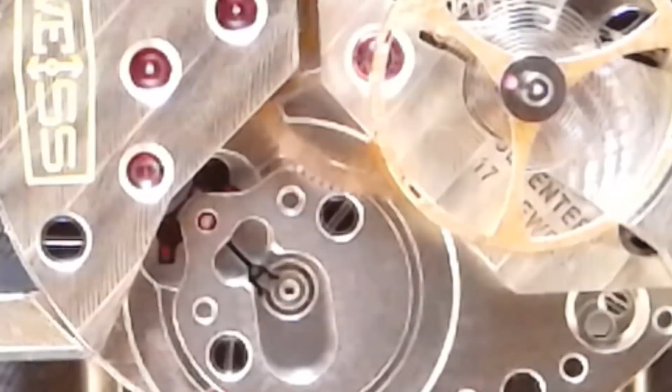And we have your watch, which uses that, right? Is that how you want to start? Yeah, my watch has the Swiss Lever Escapement in it. Boom, we zoom in. I'm glad that all of you out there were so kind and commented nice things about our new watch cam. Some people asked what it's called, an IPEVO. I got it on Amazon. So it's whatever, you roll the dice, you win some, you lose some. We won this one, it's good.

Okay, so to start, I'm the student here, and I don't know a whole lot about escapements. They kind of confuse me and intimidate me. Well, they're quite simple once you get down to the little details in them.

I have one here on the screen that I opened up, and the escapement includes your balance wheel, which if you've ever had an open watch where you can see the movement through the case back, the balance wheel is what's bouncing back and forth really quick. It's the one thing that's moving quickly, and you can really see it move. The center of the action of your watch is the balance wheel.

Okay, and is the balance wheel, if you had a tourbillon, that's what's going to be inside the tourbillon, right? Yeah, the balance wheel is contained within the tourbillon. Tourbillon keeps that from getting all out of whack from gravity, right? Yes. Okay, because there's a spring that's coiled, and if you could imagine a spring that's coiled, if you hang it one way instead of another way, it's going to droop.

Right, because of gravity. So can you get your little pointer out here for the visual folks? Point out on your movement, and let me zoom out a little bit, so those of you at home know what part of the movement this is. Here's Cameron's movement, and this crown here is where you would wind it, right?

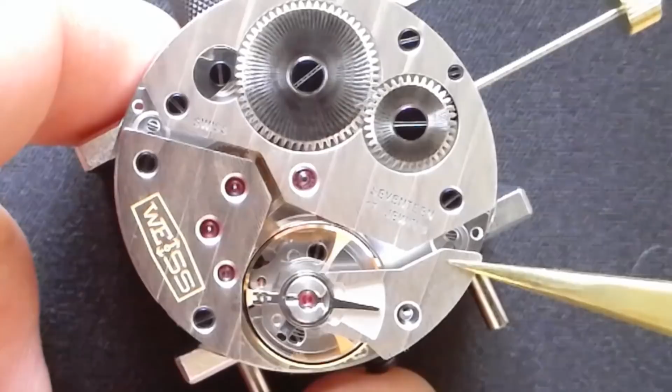And where did you just pull that out of in the watch? So that part, it goes in there, right here. So it looks remarkably cohesive when it's put together, and then you pull one thing out and go, 'Oh, what am I looking at here?' Exactly. All right, so that's removed. Okay.

This episode might be a little more visual, folks, if you're just listening at home, because we have to point at a lot of stuff. Yeah, so escapements, they're tiny, and they only really serve one function, right? They just go about it in very different ways.

Yeah, and there's a couple of culprits that cause problems with the escapement and timekeeping. So those culprits are really what weird escapements focus on, these oddball escapements that are different than the Swiss lever. They're trying to solve a certain problem.

Yeah, okay, so show me how yours works. I'll zoom back in down. Yeah, let's zoom in a little bit. There we go. So in the Swiss lever, you've got your balance wheel, and there's my little pointer there. So right on the bottom of the balance wheel, we have a roller jewel. This red pin hangs down from the underside of the balance wheel.

As that balance wheel oscillates back and forth, that jewel will interact with your pallet fork, which is another part of the escapement. The pallet fork has a pivot right here, and the tail is what gets knocked back and forth, just like this. So the wheel, by moving that jewel back and forth, moves the pallet fork back and forth.

Let's switch to the animation picture here. On this photo, you can see those three components. From the right to the left, you've got your roller table that has the roller jewel, you've got your pallet fork that's going to be knocked back and forth, and you've got your escape wheel. And this is not showing the balance wheel.

The balance wheel has been removed because it would kind of obscure some of the other parts. But the balance wheel would be over the roller jewel all the way on the right. Yeah, that's this guy here, for those of you looking at my screen.

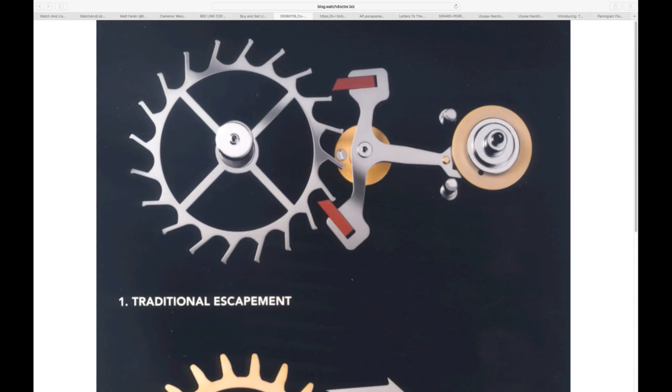So the main thing is to release teeth in an organized fashion rather than the watch just unwinding quickly. So you want the balance wheel to travel back and forth at a certain rate so that it locks and unlocks teeth on your escape wheel at regular intervals.

So the short version is that this wheel bangs back and forth, and it causes this thing to sort of tiptoe dance back and forth, and that action moves a cog wheel one increment per second, roughly. It allows the wheel to move. It doesn't move it, but it allows it to move. Oh yeah, it's like releasing a stopper briefly and then restopping.

So with that, the problem you have is there's a lot of sliding friction, and there's a lot of difference between a watch that's fully wound and a watch that is almost out of power. Okay, so it'll literally slow down and weaken as it runs out of juice. It can, yeah. It's not supposed to, but nothing's perfect. Well, if it's a problem, what is that problem, that it would slow down? Because the spring is losing power as it gets to the end.

It won't always slow down. Could it speed up? It can speed up. If you think about the oscillation of the balance wheel moving fewer degrees, it could potentially move those fewer degrees quicker. That's a good point. It shouldn't, but it could. Either way, it ain't reading what it's supposed to read. That's the point.

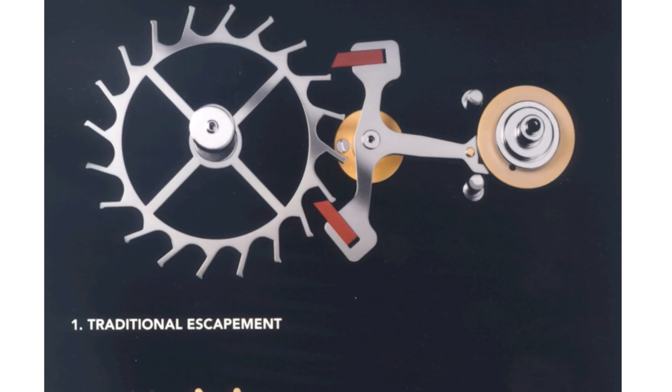Right, okay, I think I get that. It's not too complex. Okay, let's go back to your watch here, and then show me back in real life all those parts again.

So what we've got is the balance wheel with the roller jewel, and the balance wheel will be going back and forth, hitting this side of your pallet fork, which is the tail end. If I can do this.

And the bit that actually knocks on that pallet fork is the little jewel on the end of the wheel there, right? Yes, that little jewel that hangs down.

So if you see, I'm going to touch this very lightly. We're zoomed in, this is where the microscope cam would have come in. I'm just going to touch the tail very lightly, just like the jewel would, and it's going to actually jump forward because not all the power is coming from the jewel. See how I just kind of tap it? Yeah, and it just moved on its own.

So this jewel taps it, and then this wheel will pull it forward the rest of the way. And as it kind of pulls it forward the rest of the way, it'll then hit the other side of the jewel and knock it the other way to keep it moving. Cool, you constantly have to put power back into it.

But there's a lot of sliding friction in there, which requires lubricants, which dry out over time. And also with the sliding friction, you lose energy. So it actually requires like oils.

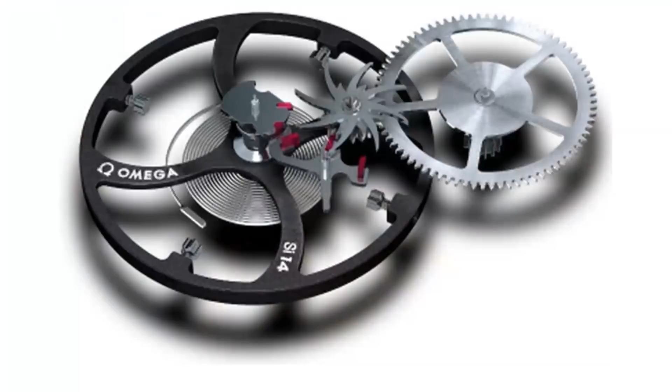Here is the Omega Coaxial Escapement, and we do have a watch. And it is my watch for the next 12 hours. I made a deal, son. I made a trade. This watch, it's got to go, but this has the Omega Coaxial movement.

So what's coaxial? You generally have two things on one axis. This is what that word means. There's something that shares an axis. So what are we looking at in this coaxial movement here, or coaxial escapement?

So the coaxial escapement, first thing that you look at, you're going to see a very odd-shaped wheel that is very different than the standard escape wheel. Are we referring to the throwing star-like wheel, exactly, in the center there? The ninja star right there. Ninja star escapement, yeah.

So you've got that, and then you've also got 3 jewels on the Pallet Fork instead of 2. So your Pallet Fork in this image is right here, sort of to the south of the escapement. And it kind of ends up— this is called the escapement wheel, right? I'm not an idiot, okay, what's this called? For this, we'll call it the escape wheel. And then you've got the Pallet Fork.

The Pallet Fork here is really only working on that wheel. The wheel is also putting direct energy back into the balance. If you look here, you've got 2 jewels on the balance. Remember, Cameron, we're on the radio. Where is here? The center of the balance wheel. So back where we had the roller jewel, which is on the bottom of the balance wheel. Now we've got 2 roller jewels, one on each side. Slightly different shape because they're doing different things.

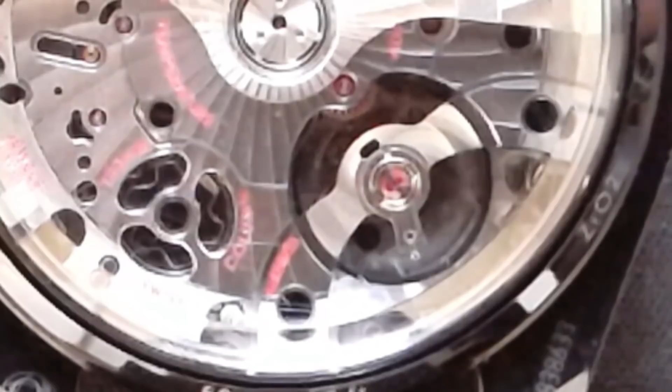So is there anything on this actual watch worth pointing out visually on my Omega there? It's hard to see anything. The one thing they do have here is dual barrels as well. You've got these twin barrels - can't even really see those, right? The only way I can see them is I know that they're colored black, these little black parts peeking out here. So just because I know that now I can see them.

Black is sort of the thing with this watch. You've got the silicon balance wheel, which is black as well under here. But there's really not a whole lot you can see because the components are so small, and they're all kind of hidden under here. But this is one of the current models that uses the coaxial.

Well, the AP escapement looks like this. What is AP? Old school, one of the big three. What have they been around for, 200 years, 150 years? They've been around a very long time, and they've been continually operating.

That's the thing, which is pretty rare, that's what gets you into the big three - continually operating, and they are still privately owned. They also have original family members on the board. That's rare these days, very rare for a watch company to have that.

I think you did say, I was reading before we started recording, our ideas for lists of episodes - one was the family tree of corporations and watchmakers and how that leads to watches being what they are, which I found very interesting. We're gonna do a show on that for sure.

So what has AP contributed to the world of escapements? AP came up with their own oilless escapement. Oilless means less servicing. What does oilless mean?

So less service, because mainly what you're going to see on a manual wind watch is a timing error. You say, 'Oh I have to service this watch because it's running too slow or too fast, something's wrong with the timing.' Maybe it has a shorter power reserve, and only when it's fully wound is it keeping time, and then after 12 hours maybe it stops keeping time. That's going to be because your escapement oils have evaporated.

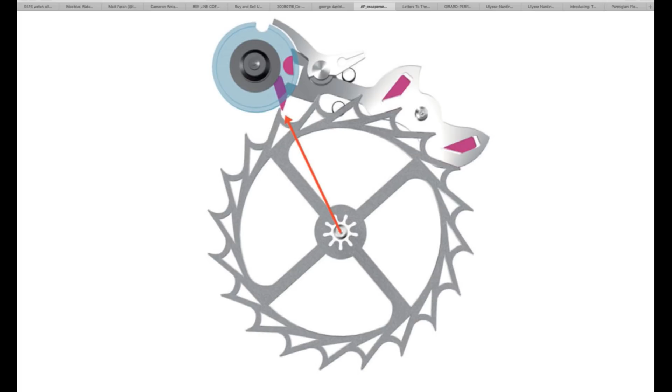Well, the idea is if everything has been adjusted properly and everything is perfect, it should not be able to unlock without the balance wheel being in just the right position. So that's something that the AP escapement took into account, is that shock protection.

So it's got a lot going for it. Especially, I think the most interesting thing is being oilless and using traditional watchmaking materials.

That's very cool. And can this be serviced, or is it kind of a no-service thing? It can be serviced, just replaced parts. Yeah, it can be serviced. So it's more like the Swiss lever in terms of serviceability than it is like the coaxial escapement. The goal was to be traditional, but also have less service intervals by eliminating that oil.

Oh, and do APs have longer service intervals than some other watches? Only the watches with the AP escapement. It's not in every watch. Oh, because AP uses... They also have... The majority of their watches are Swiss lever. Oh, they have a few models that are AP escapement models.

What models, like, no pressure, but what types of... The Chronap. What's the Chronap? It's a pretty cool looking watch if you want to pull it up. We're gonna take a look at that right now. Just one P. Oh, sorry. Audemars Piguet Chronap. AP Chronap.

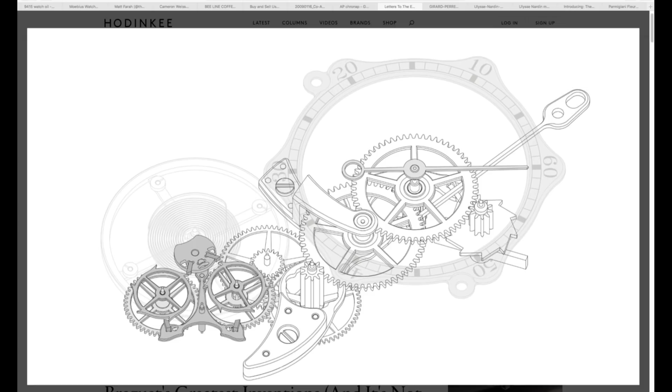FP Journe is an interesting watchmaker because he makes really old school looking watches, but he makes them now, and he hasn't been around for all that long. Well, he has been around a long time - he's a watchmaker that's living and still making watches, so not that long compared to brands started hundreds of years ago. His first watches were like in the 70s or 80s, when he made his first tourbillon, and then I believe in the 90s he started actually selling to the public. So it's maybe 20-25 years.

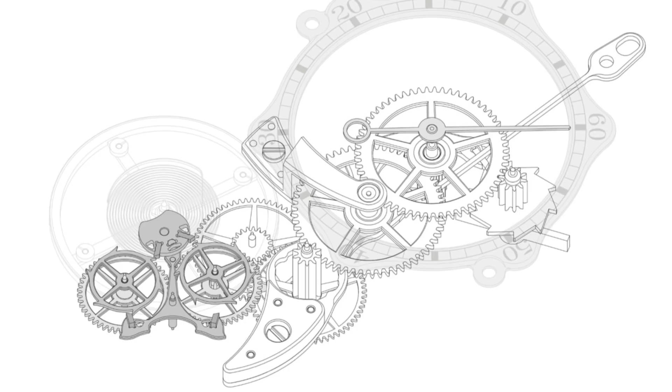So he uses traditional materials, like the AP escapement, which I think is very cool as a watchmaker. I really doubt that in 100 years you're going to be able to open up a watch with a silicon escapement, and if you've got worn or damaged components, how are you going to replace them? Do you think silicon gets worn, or do you think it lasts longer? I think so. I mean, even if a screw comes loose in the movement and blocks up a wheel and you break a tooth or something, it could really be anything - water gets in there. So the traditional materials, to me as a watchmaker, are very interesting. Not to say the silicon escapements aren't interesting, but I just don't know if, 100 years from now, there will be people who can open it up and fix it, similar to how we can open watches that are hundreds of years old and fix them, because they were made with technology that's still really accessible for the average watchmaker, whereas I don't see silicon technology becoming accessible for the average watchmaker.

Cool, FP Journe. Moving on.

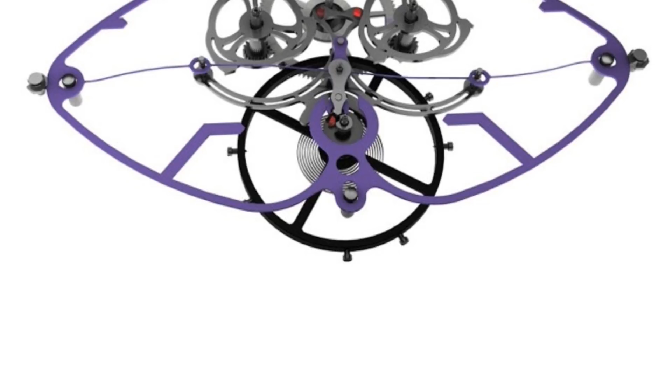Girard Perregaux. Cameron, here's a crazy escapement. I'm sorry, my image is a little off here, folks. Instead of looking like a regular escapement, this thing looks like some kind of butterfly insect - just a very odd-looking system. I don't really understand what it is that I am looking at, but something tells me that you do.

As well as I can without having ever seen one of these in person - I don't know a lot about Girard Perregaux. What is their deal? I mean, I know they make a very high-end watch, but is there something that's their thing? They've been around a long time. Recently, they've kind of not been doing the best job with their designs and marketing and things like that. They're still a great company, they have amazing watchmakers and great teams of people working on everything, but they haven't really been hitting it out of the park as far as getting the word out there and coming up with designs that people are really getting behind.

Overall aesthetic designs. Yeah, but they have a cool escapement. Yes, they do have a very cool escapement.

So what is this called and how does it work? This is their Constant Force escapement, the Girard-Perregaux Constant Force. Constant Force is kind of a general term, and all anyone saying Constant Force really means is that from when the watch is fully wound, it's going to have the same amount of force going into the escapement as when it's almost empty.

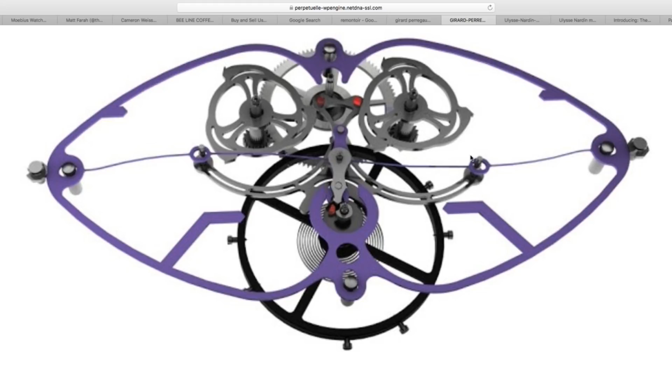I haven't seen that in any other escapement design. And then your balance will come back again and knock it off of that tooth it had just locked on, and it will do the same thing on the other side, where it ramps up and snaps back the other way. It's really cool.

And it looks good when it's in a watch, too. Some of these are extremely dope. I mean, look at that. This is some craziness. Is that the back or the front? That's the back, but I wish it was the front. You can put the clock on that. These watches look very cool.

Well, that's certainly a neat escapement. This is like a defining feature of this company, then, huh? Yes, I think this is the biggest thing to come from them in a long time. It's really, really cool looking. I'm trying to find the best.

That's a good zoomed in image of it there. Really, really cool. And so the idea is it's better at regulating that even force all the way until it runs out of juice. Yeah, over the whole 6 days of power reserve, keeping everything regular so that the timing doesn't change, and also eliminating the need for lubrication.

No lubricants there either, yeah. And the reason they won't have lubricants here, I believe, is going to be the material. I'm not sure about what kind of sliding friction, because you do have sliding friction on that escape wheel. Well, you wouldn't want to have lubricants, right? Because you can see it all. Wouldn't it get all messy? You might not see the lubricants. It could be very little, but I don't know what material that escape wheel is.

My guess is it's going to be a silicon material or some kind of material that is good for frictionless and does not need oil in the first place. So that's the upside to a silicon escapement. You can make a regular Swiss lever escapement design, but make all the parts out of silicon, and then you don't need oil on a Swiss lever.

Okay, cool. So I'm going to bring up an escapement that I know about. Hey, about this, I know something. This one, I actually had the privilege of going to Switzerland and visiting the Ulysse Nardin factory. And this is the Ulysse Nardin Anchor Escapement, which, believe it or not, is a thing that I know about.

So here you see your escape wheel, which has a really cool design to it. I think it's got a lot of teeth, probably 24, I think. Is that all in multiples of 12 or 6? No, actually, the standard escape wheel is going to have 15 teeth. Oh, that'll be a regular escape wheel, about 15 teeth. Okay, well, I have not counted this one, but why is it 15? What does 15 have to do with the math?

So it gets really complex. Oh, no. Did I just open a door that I don't want to go down right now? Probably. Do we need to have a separate show that's a math day? I'll touch it real quick, but I'm not going to go too in depth.

You have the angle that's on your pallet forks, on the teeth, the jewels there, and then you have the angle of the heel of that escape wheel tooth. The way those interact and slide against each other, there's a certain degree they need to be for them to slide and have just the right amount of friction and transfer of energy, so everything works the best that it can. So that's how we kind of design it, using set angles and then working from there. So you just kind of end up with that number of teeth, whatever that math is, in that range.

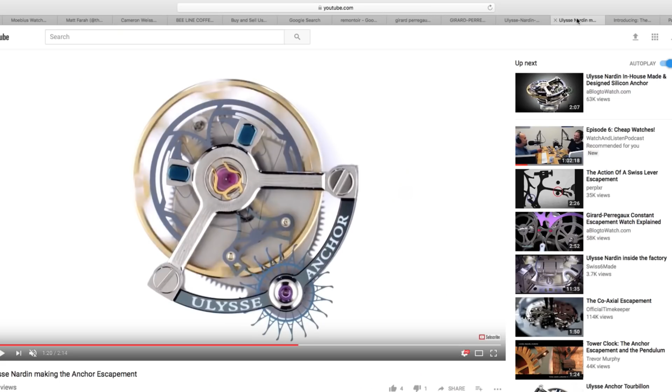This escapement is really neat, and it's actually kind of tricky to see in this image which parts are the whole escapement. I'm going to play this video so you can see how it moves here. The point of this thing is, here is your escapement. Is this the Pallet Fork? Yeah, that's the Pallet Fork. The Pallet Fork doesn't have a pivot at all.

They decided that a pivot is a point of friction that they don't want in their life. So holding the Pallet Fork both horizontally and vertically are these strips of silicon, which, like a band saw, if you were to bend it, or like Cameron just described in the Perregaux movement, as these things get knocked back and forth, they bend and bounce back and forth, but they're also holding that pallet fork up by way of this other lateral structure.

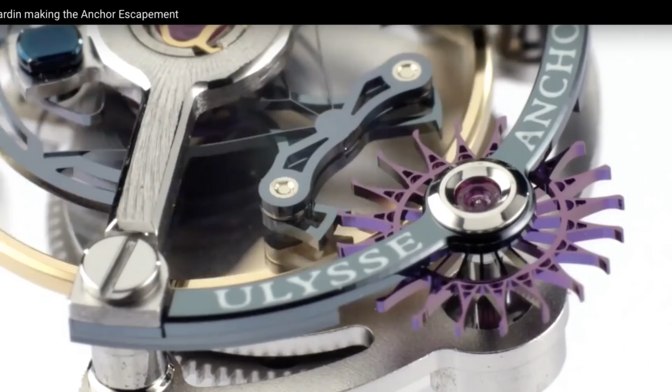Keep playing. I just think that's very cool. It's also in a tourbillon, so as you can see, the whole thing is spinning around and round. But I just think the idea of using those bands that bounce back and forth is so neat. Yeah, and again, silicon components, so oilless there.

It really was very frustrating because this tour was extremely cool, and I learned so much. And after spending 3 hours with these guys, all I wanted was a watch with the Anchor Escapement, and then they told me how much they were.

Ulysse Nardin makes watches that are in the 4-figure price range, but anything that's got an Anchor tourbillon in it is like $80,000 and up. It's very, very expensive, but I don't know.

That to me was like a super neat kind of thing, because how do you have something go back and forth evenly without a pivot? Without any other lateral twisting, and there's no gravity, no drooping. It's crazy that it can do that, and without the pivot point, no less, is super wild.

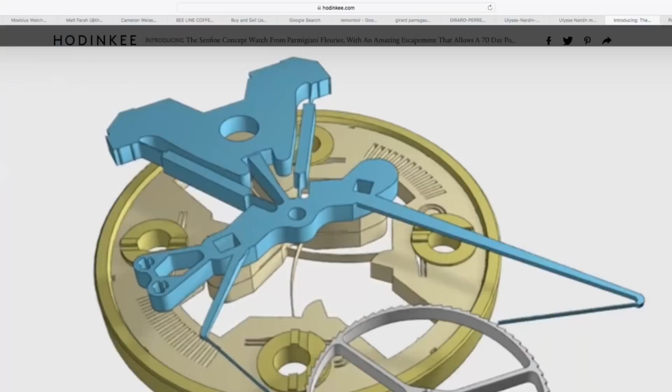So I want to finish off with this one you brought up. Tell me what this is. I have to adjust the picture a little bit so we can see all of it. What are we looking at here?

So this is a balance wheel for something that Parmigiani has been working on with some other movement designers, and it's essentially similar in having these bands, only available because of new technologies for making silicon parts - these really thin bands and flexible parts of the balance. Instead of a balance wheel swinging back and forth like 300 degrees, this only swings back and forth about 15 degrees. That's not very much, barely swinging back and forth.

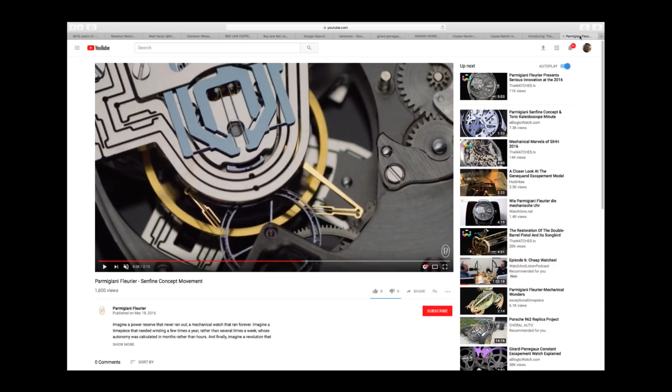Yeah, and actually, look, I pulled up a video. Here's video of this thing moving, and this is real time, right? Yeah, that's real time. It's called the Senfine escapement - Parmigiani Fleurier Senfine. I'm sorry, it's such a short video clip.

Can you play it at half speed? Wait, is there a half speed thing? I don't think so. So essentially they slowed it down so that it takes very little power to actually move that balance wheel. Right, because moving the balance wheel 15 degrees versus moving it 300 degrees and speeding it up and slowing it down and going the other direction, it just takes way less energy to do that, right?

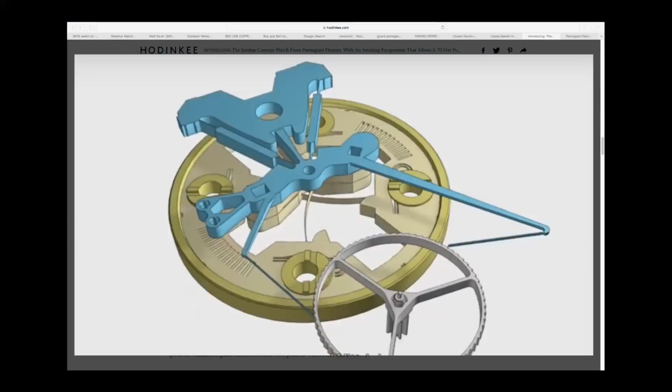Yeah, exactly. So a lot less energy to move that balance wheel, which allowed them to get a 70-day power reserve. Did you say 70? 70, 7-0 day. That's absurd, completely absurd. And it's a totally different escapement because it doesn't look like any of the other escapements.

Yeah, you literally have your balance wheel kind of bouncing back and forth, and you saw those two pins coming down from the top that are interacting with some weird holes in the balance wheel, and the balance wheel's kind of touching those and bouncing back and forth. It's a lot of these springs that are all integrated into single components, whereas in traditional watchmaking, you'll have your balance wheel, and a spring that's then colleted and attached to it.

With this new technology, they're shooting tiny little electrons, it's like molecular 3D printing, basically. So they're able to make these really fine components and make them in one piece. When you have that molecular structure, you get rigidity and all that kind of stuff.

So they can literally put a spring wherever they want within that component where it's integrated, and then they have these basically like grasshopper kind of legs coming off with springs that are interacting with that really fine-toothed escape wheel where you have far more than 15 teeth on it. I don't know the exact count, maybe 50 or 60.

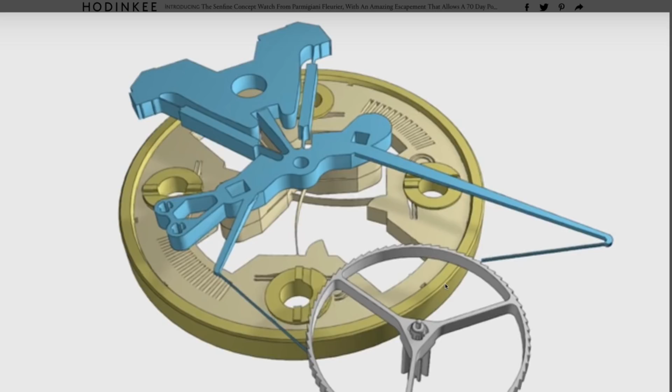And it's just these tiny little ribbons, probably silicon, interacting with it. It's not like a heavy duty gunk gunk gunk gunk. It's just these tiny things, they look like thin hairs interacting with that, and they'll bend and flex, and then spring back.

Let's go back to the video. Now that you know what to look for, let's watch again, and you can actually see the little tiny teeth. See them? They actually have shrouds around them, those little fork shrouds, bouncing back and forth. So cool.

On the one hand, a 70-day power reserve is awesome. On the other hand, you kind of want to see some motion, like I like looking at the back and seeing something going on. I'm not sure, you see it moving, but it's not swinging so far.

But you definitely see it move, especially because your pallet fork has these really long arms of springs that are kind of grabbing and almost hugging the escape wheel. So you see a lot of movement there.

Instead of seeing the balance wheel swing back and forth, you're really seeing the escape wheel moving around. The biggest thing you're going to see move is what is kind of like the pallet fork, but it doesn't look like any kind of pallet fork, bouncing back and forth on that escape wheel. Well, them's some escapements.

That's an hour. We always wonder, are we going to finish up? How long is it going to take? It's an hour and 10 minutes on escapements. That's crazy, I feel like I learned something there.

It's a tough concept, really, because you have to visualize the motion of these machines, and sometimes in two dimensions it's difficult. And it's not a single direction of energy flow, it's flowing in both directions, back and forth from component to component, and that's why they're able to run so efficiently over long periods of time.